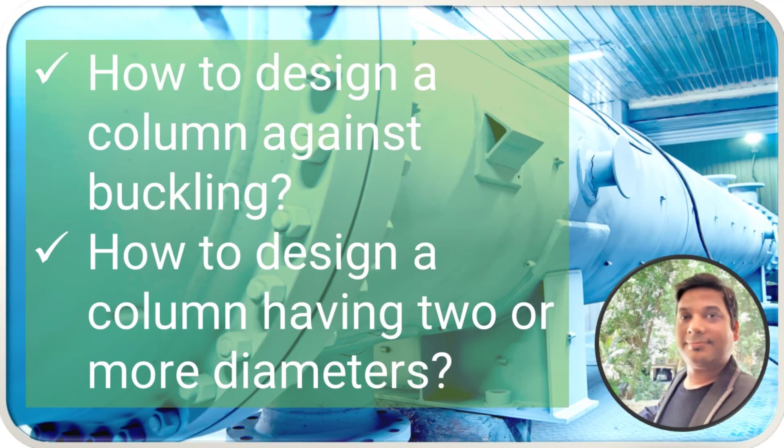In this lecture, we are going to see how to design a column against buckling, and how to design a column having 2 or more diameters. Welcome to part 2 of column design. In part 1, we covered thickness calculation of a column due to various loads like internal pressure, wind, and seismic. In this part, we are going to see how buckling can be calculated, how to calculate whether the column is going to fail due to buckling.

Second thing, what we are going to see is how to design a column having 2 or more diameters. The diameter is not uniform. If it's changing, then it might be connected with a cone. What are the types of additional loads which might be there? The discontinuity stresses at the cone, how to design that. And then deflection, how to calculate the deflection of a column, and wind induced vibration. These are the topics which we are going to cover in part 2.

Before we start, if you remember, we asked one question related to the allowable stress. When we calculate the thickness using wind and seismic, I mentioned that we can increase the allowable by 20%, as per UG-23(d) of the code, ASME Section 8 Division 1. So the question was, in normal cases, we only allow stresses up to the allowable stress. But when wind or seismic comes into the picture, we allow 20% more than the normal allowable. So how is it possible? How can we allow more for wind or seismic than for normal pressure and temperature?

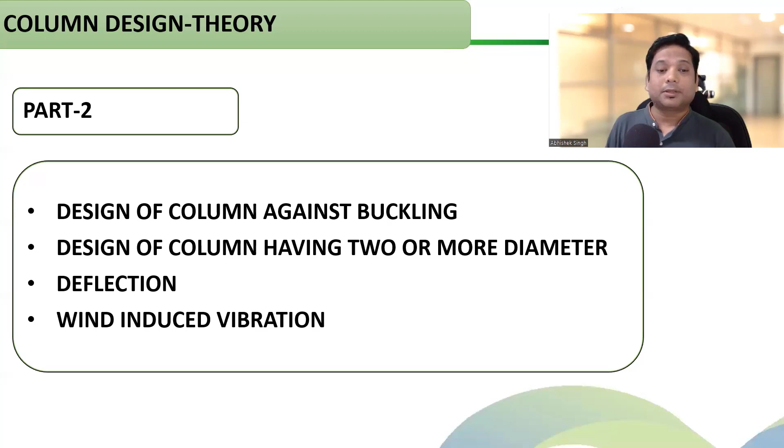So how to do that calculation? Just follow UG-23(b) of ASME Section VIII Division 1. I'll just project that. So if we go to the buckling part of UG-23(b), step 1 is very similar to what we do in external pressure. If you remember that, it will be much easier.

So for external pressure calculation, what we did, we went to the geometrical chart, and based on D/t and L/D ratio, we found factor A, which is a geometrical factor. In this, we don't have to go to any graph. A formula is directly available, which you can apply and find A. It depends upon the outside radius divided by the thickness. Only these two parameters, radius and thickness. So with that, you will have factor A.

And then, like we followed in external pressure, just follow the chart of that material, CS-1, CS-2, whatever is applicable. Go with factor A, whatever temperature line it is touching, move horizontally, and you will get factor B. And that factor B is actually the allowable compressive stress. So that is the maximum compressive stress you can allow in a column.

But now you'll ask, this factor B is just taking the outside radius and thickness into the picture. It does not depend upon other compressive loads which are already there. Like I said, there is wind, there is seismic, there is dead weight. Those are also contributing to the compressive stresses, but here we are not taking them into account. So how to do that? First of all, this B is your buckling pressure, which as per code you are calculating.

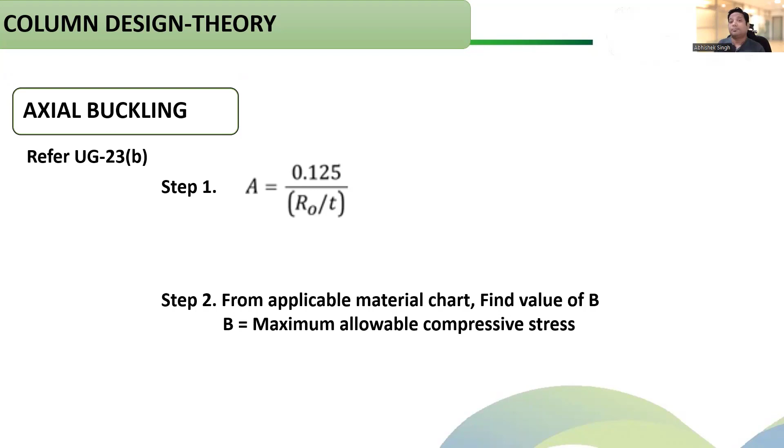So now how to take care of the buckling? If you go to ASME Section VIII Division 1, clause UG-23(b) gives the steps for buckling calculation. It calculates the maximum allowable compressive stress for any vertical column, or it may be even horizontal. The philosophy of calculating buckling is the same as the calculation of external pressure, because finally the buckling is happening due to excessive compressive stress, which is generated mainly due to external pressure. But in the column case, it becomes critical because there are other loads present creating compressive stresses.

Like we saw in part 1, the dead weight also creates lots of compressive stress. There is wind or seismic. There are additional moments coming from either a nozzle or additional eccentric weight, which will also create some moment, and finally it will convert into stresses, tensile on one side, compressive on one side. So there are lots of loads which are compressive in nature, and compressive load creates buckling.

And in buckling, your vessel or any part fails very catastrophically. It will not give you an indication. It is not going to yield. If yielding happens, it gives you lots of indication because yielding comes with deformation. You can see it. But buckling will happen very catastrophically, immediately. There is no indication at all.

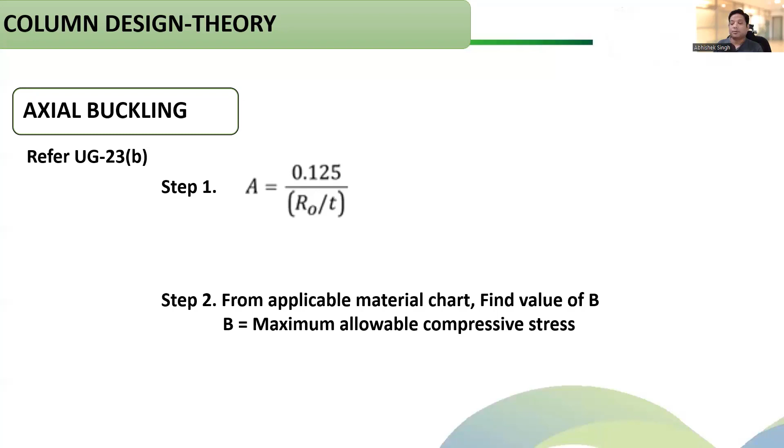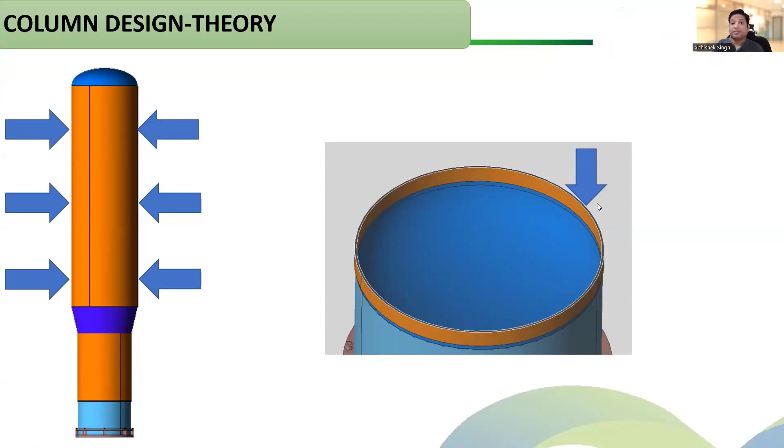But what about other compressive loads which are there? That is not taken into account. So see, in this case, not only the compressive stress is due to external pressure, but also due to the weight and other loads like wind, seismic, or the other loads which are creating bending moments. Okay, so the chances of buckling will be much higher. So how to check that? So for that, we do a unity stress check.

How we do that? We calculate all the combined compressive stresses like we did in part 1. We'll accumulate all the stresses which are compressive in nature, and divide that with allowable compressive stress based on factor B, which we have got from 23B, multiplied with 20%, because that 20% higher allowable stress is permissible. So total combined compressive stresses divided by allowable compressive stress based on factor B increased by 20%, plus whatever axial stresses we are having, divided by allowable external factor B.

How different is this factor? Now you'll see that both are looking similar. Okay, but this allowable external factor B is the factor B calculated for external pressure. So the axial stress created by external pressure divided by the allowable, which is the B value we get from doing the calculation for external pressure. Okay, this B is different. The 23B, we just saw how we calculate the factor B based on 23B. This is based on 28. Okay, so the final addition of these ratios should be less than 1. If this is less than 1, then the unity check is passed and we are good.

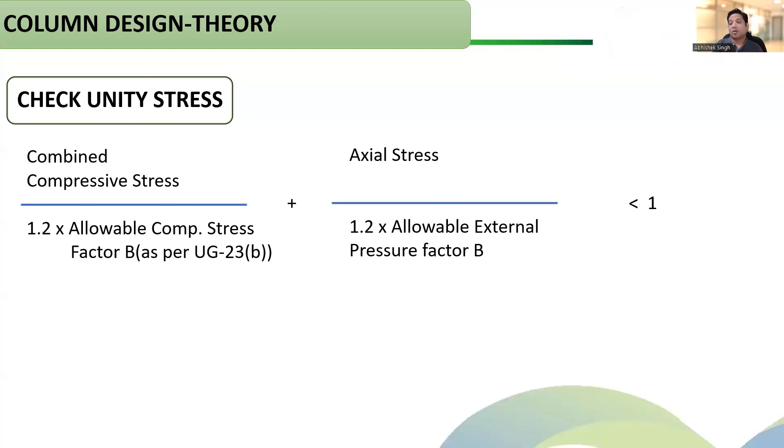Now let us come to the second part, which is tall columns with 2 or more diameters. Okay, like you see in this figure, we have a column which is having different diameters. The diameter is lesser at the lower part. The diameter is more at the upper part. Do you think any difference will be there in designing a normal column compared to this column? Do you think anything?

Just pause this video and think about it. Before going further, just pause and think why we are trying to discuss what is different in this 2 or more diameter vessel than your normal 1 diameter column. Okay. Now let us discuss that. I hope you have thought of it, and let us see whether it is matching with what you thought.

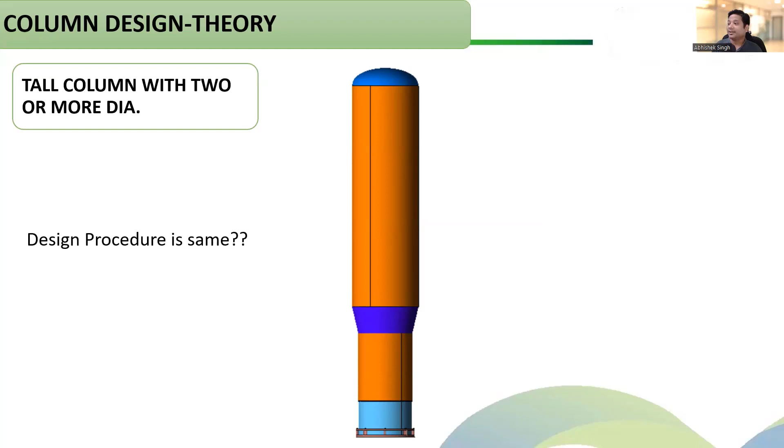Great. So now let us see what happens here. See, normally there will be a cone which will be connecting your larger diameter to the lower diameter. We don't have any other option. We'll have to provide a cone to join this. Now you see, we can put a simple cone without any knuckle or flare, or we can have a knuckle and flare.

Which one of these two do you think is a good design? A simple cone or a cone with flare or knuckle? Okay, just think about it. Great. So I hope you have thought about it.

See, if any part is changing its shape very suddenly, there is a cone and then a straight shell coming. Definitely, if the parts are changing, there will be discontinuity stresses. And they will be very high if your part is changing very suddenly without any radius. That is the reason providing a knuckle and flare is a really good design.

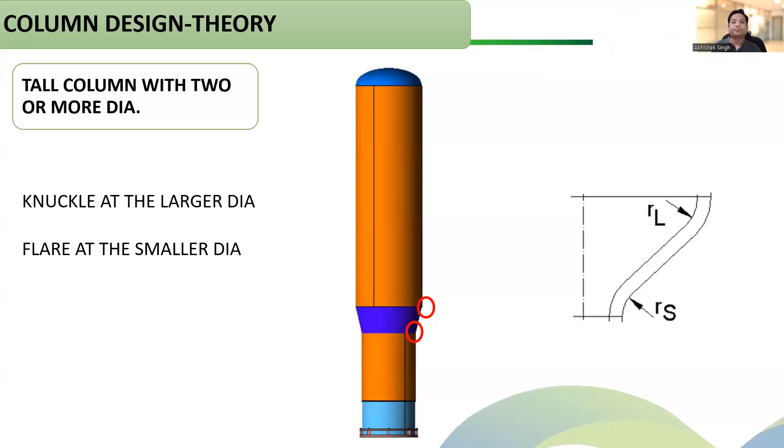So now if we are providing a knuckle or flare, what should be the radius? We have already studied in the toriconical part what the radius should be. The same thing applies here. It is a minimum of 6% of the OD or 3 times the thickness. Whatever is the minimum, that is the minimum knuckle or flare radius. If it becomes more, the forming becomes even more challenging. So keep it close to the minimum value, but definitely more than what the code gives. So this is the second part: cone flares and knuckles are preferred, and this is the guideline for the radius.

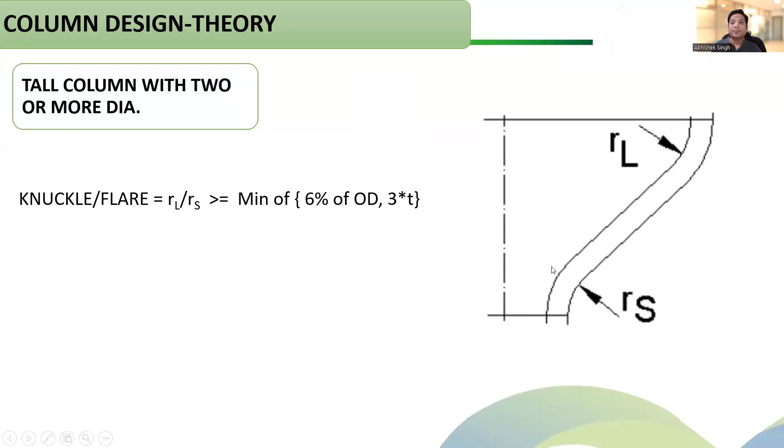Then what is next? Does that cover the two-diameter part? No. If there are two diameters and a cone is coming, there are discontinuity stresses generated at these points. Wherever you have a change in diameter, there are discontinuity stresses, and you may be asked to calculate them. You don't have to go for FEA in this case. There is a guideline in Bednar on how to calculate the discontinuity stresses at the cone and shell junction, and we are going to talk about that. So this is the area which is critical.

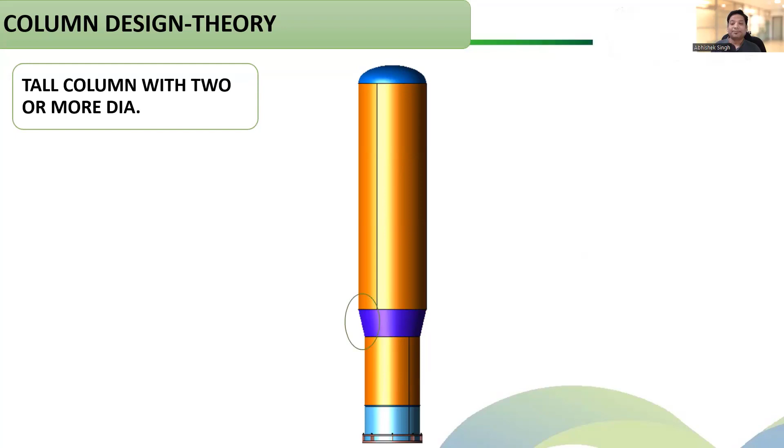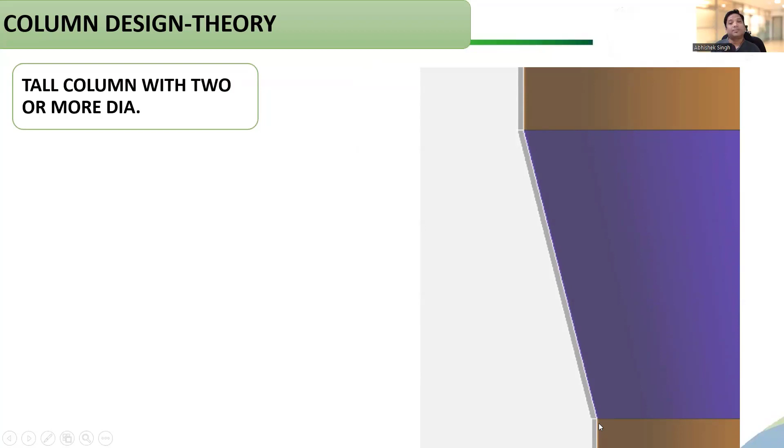Now, if we just enlarge that, these are the portions we are going to talk about: the diameter change at the larger diameter and the smaller diameter. These are the two places we have to focus on.

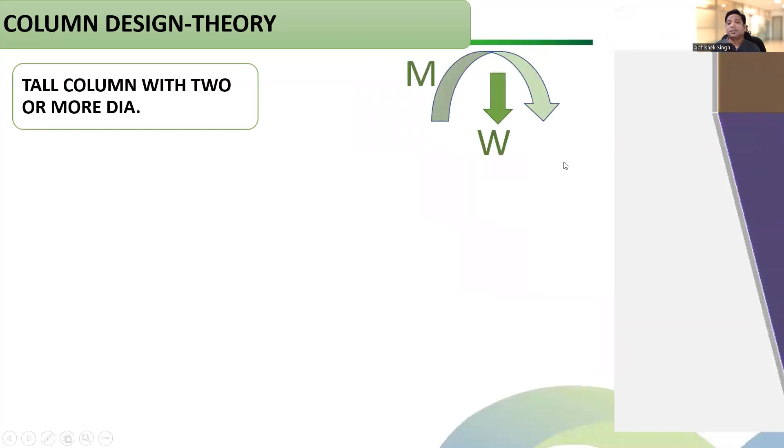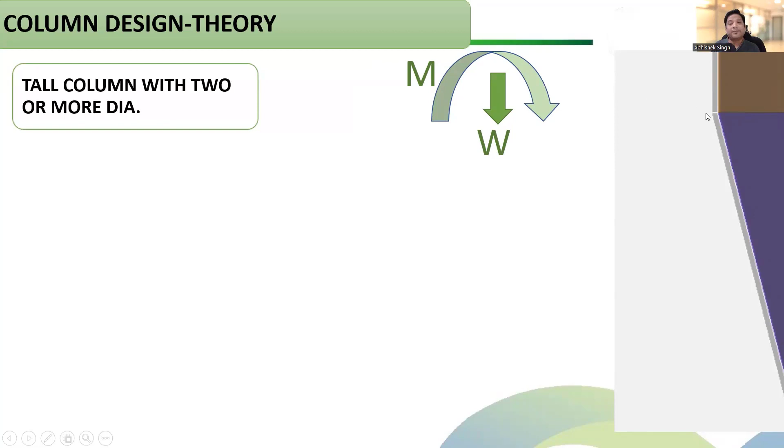Now, just consider at this portion, whatever is above it, there will be some weight exerted on this cone, right? We focus on this section. We are trying to find the end condition for designing this discontinuity. So whatever is coming above, that is the weight we use, and the moment created at this point due to whatever loading we have is the moment we are talking about.

If we say M is the external moment, W the weight at the junction, D the mean diameter, and T the corroded shell thickness, how do we do the calculation? First of all, we have to calculate the equivalent pressure, PE, because the chance of failure here is more due to buckling. So we convert the moment and weight coming at this portion into an equivalent external pressure. This is the formula you can use to calculate the external pressure.

So L here is this value 4M divided by pi d square. So this is actually the unit stress calculated due to bending moment and the weight. It's nothing more. It's a compressive stress, and it is just linearized by excluding the thickness. So a linear stress; thickness is not coming into picture. If you just divide it by thickness, it will be the exact formula for calculating the compressive stresses. So based on this, we will get the equivalent external pressure.

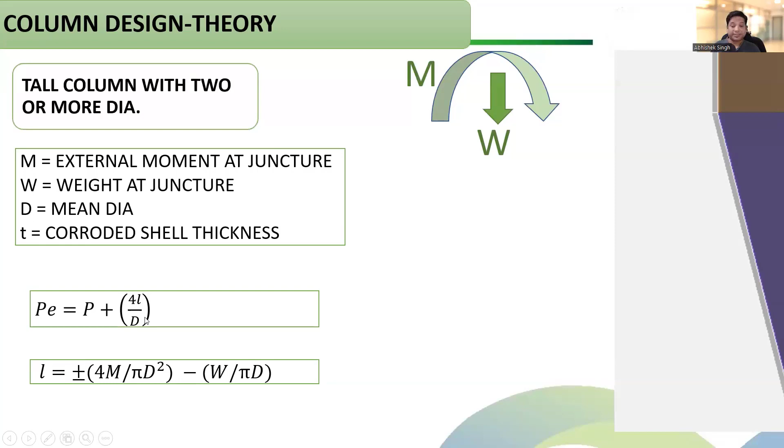Now what to do with that? Using that equivalent external pressure, we will be able to calculate the stresses in the cylindrical portion and also in the conical portion by using this formula given in Bednar. The formula may look complicated, but we can definitely simplify it. So this P we have already calculated. R is the radius, T is the thickness.

So if we are talking about the larger part, the radius and thickness, and we are talking about the stresses in cylinder. We'll calculate the stresses in cone also, but first we are talking about the stresses in cylinder. So we'll use the diameter and thickness of the cylinder. So all these things are known. Now 0.5 plus minus X. The X is a coefficient.

This value you will get in Bednar, and it depends upon the ratio of the thickness of the cone and shell. That is defined as n, the ratio of thickness of cone and the thickness of the cylinder. Based on that, and also the alpha, the cone angle, these two parameters, you can find this X value.

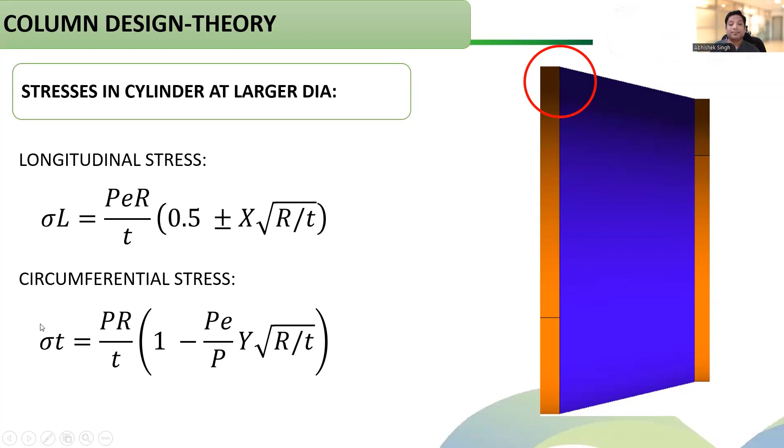X and Y, you see here, are tabulated in Bednar, and you can find that value. It depends upon thickness ratio and alpha. R by T is already known. So all these terms are known. We will be able to get the longitudinal stress at the larger diameter of the cone and the circumferential stress at the larger dia. So we have longitudinal and circumferential stress of cone. We have longitudinal and circumferential stress of cylinder.

Same thing we can do for the smaller end also. Only you have to replace the radius and thickness of the smaller cylinder. All the formula remains same, and the X and Y values will also be same, because they also depend upon conical angle and the thickness ratio, which is same. If the thickness of the smaller diameter is different, the thickness ratio may change a little, so you'll have to find a value for X and Y in this case.

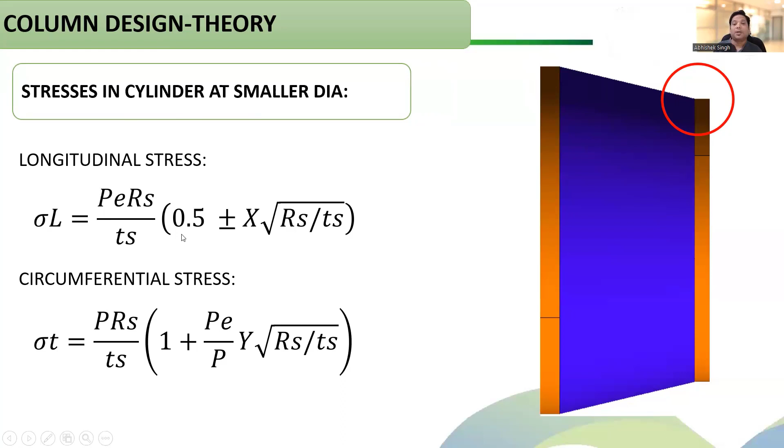So longitudinal stresses at smaller dia in cylinder, circumferential stresses at smaller dia in cylinder. This is the formula, and the same thing is for cone also. So by using this formula and method, we will be able to find the discontinuity stresses at cone to shell junction. So you don't have to perform any FEA, just design by rule. We can find the discontinuity stress. Isn't it amazing? It's a really good formula by which we can calculate discontinuity stress.

Otherwise, we used to think that we only target the primary membrane stresses with design by rule, and we cannot calculate discontinuity stresses, but Bednar has given a methodology to do that.